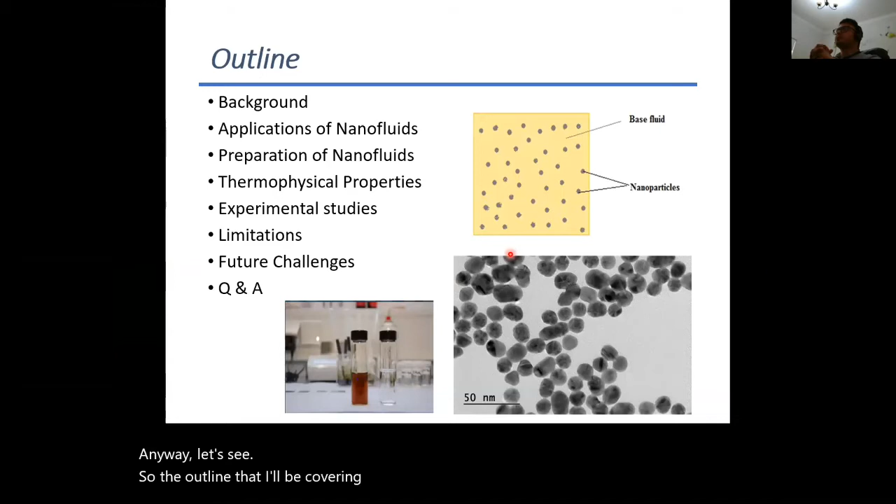The outline that I'll be covering includes the background, applications of nanofluids, preparation of nanofluids, thermophysical properties, experimental studies, and their limitations. Then we'll look into some future challenges. By the end, you'll have your question and answer session.

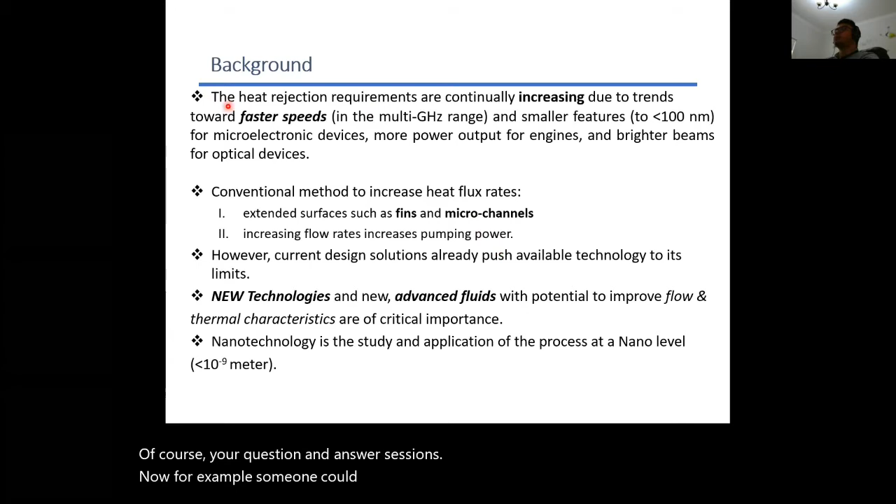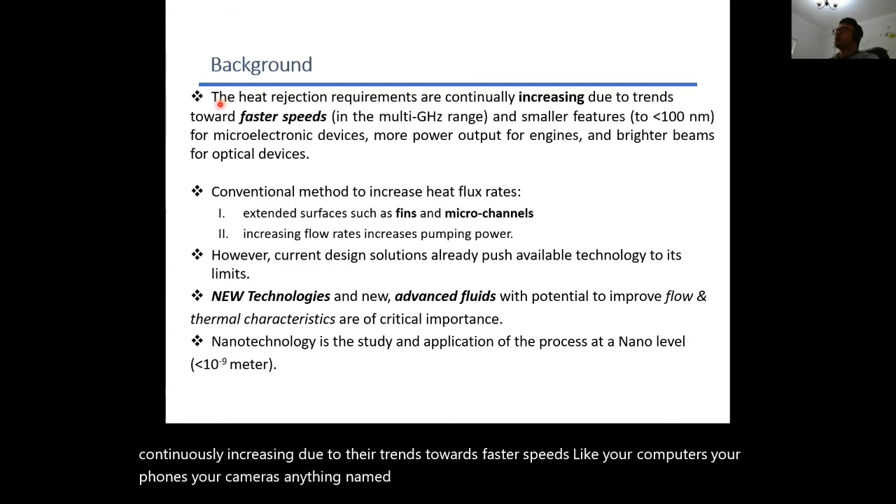Someone could ask, why do we need nanotechnology or new technologies and breakthroughs? We all know things are getting faster, so heat rejection requirements are continuously increasing due to trends towards faster speeds, in computers, phones, cameras, anything. The problem is that in microelectronic devices, engines, or optical devices, they start to heat up.

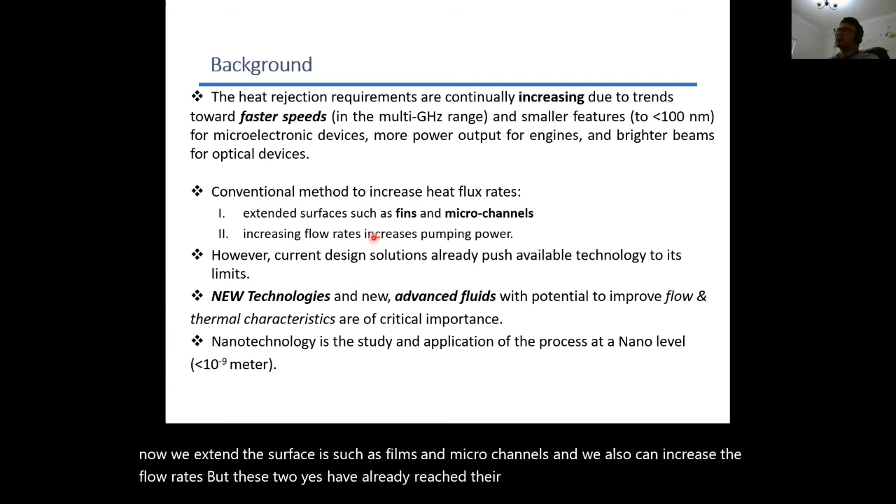So how do we cool them down? Conventionally, what we do even now is extend the surfaces using fins and microchannels, and we can also increase the flow rates. But these two have already reached their limitations, and increasing the flow rate also increases the pumping power, so everything we do has a catch. Current design solutions are already pushed to their technology's limit, and that's the reason why nanotechnology started.

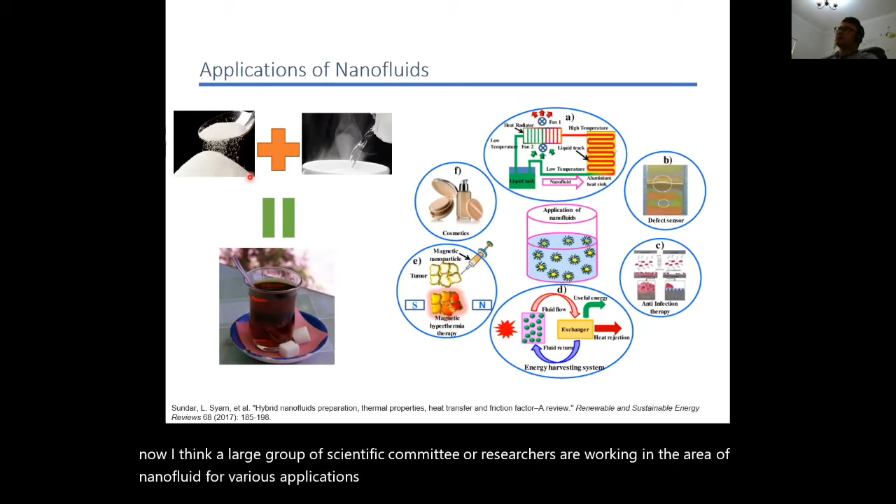To simply explain nanofluids—before it was not very common, but now a large group of researchers work in this area for various applications. An easy example: if you take a spoon of sugar and add it to water, you get a good mixture, like red tea or green tea. The idea of nanofluid is to have our fluid similar to that tea, but without any agglomerates or suspension where particles are not mixed and settle at the end. We don't want that.

An ideal nanofluid is to have it fully suspended within the liquid and become a part of the liquid so that you do not have any stability issues at the end.

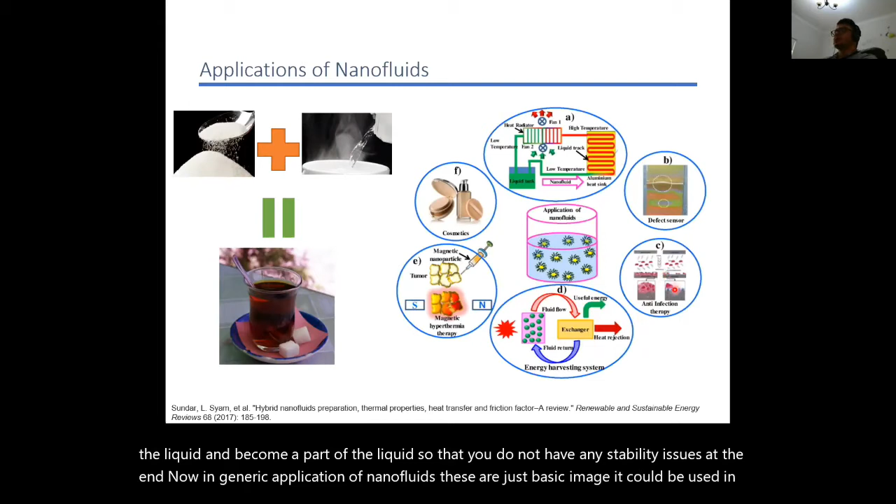Now, in generic application of nanofluids, these are just basic images. It could be used in defect sensors, for anti-infection therapy, for energy harvesting systems. Nowadays nanoparticles are being used in cancer treatment, you have them for tumors. I mean, various applications - it's also used in cosmetics.

My area mainly is the energy harvesting system and heat transfer, which is here between different solar collectors, shell and tube heat exchangers, microelectronic devices, heat sinks. So this is my main area.

But anyway, I'll show you some basic applications. So here, most of these figures, for example, this and this, are my studies that I started with in my PhD. So we use nanofluids in order to enhance the overall heat transfer coefficient. We studied in detail the energy and exergy efficiencies. We found that using nanofluid enhances the efficiency of varying solar collectors.

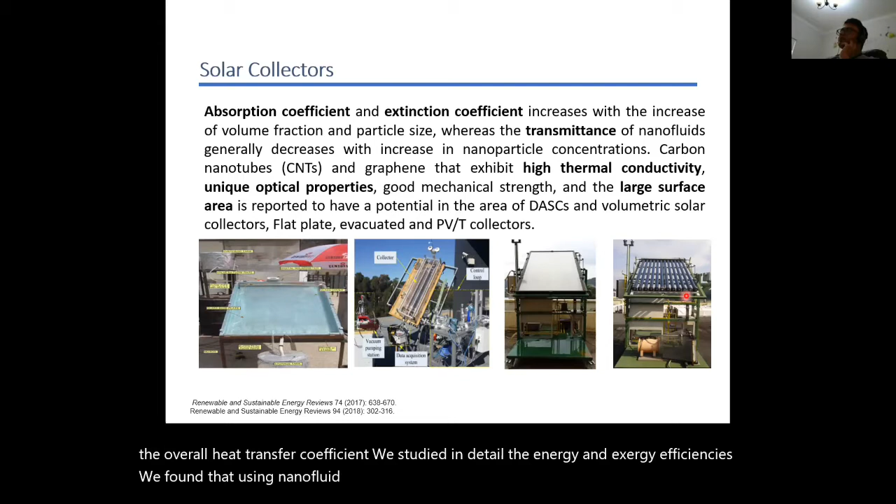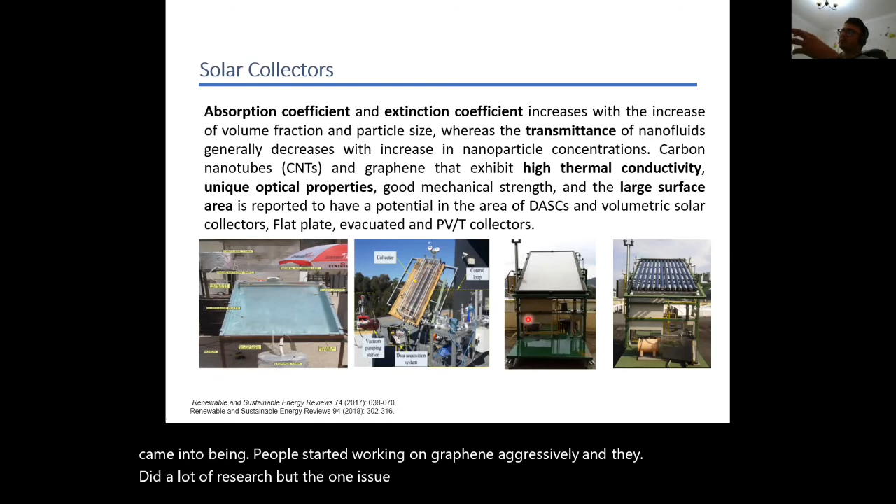Then, of course, people first tried metal oxides because they're cheaper. Then graphene came into being. People started working on graphene aggressively and did a lot of research. But one issue is again the cost here - the better the thermal conductivity, the better the properties, sometimes the cost is higher for those nanoparticles.

So this is one of the challenges that we'll talk about later, on the cost. Yes, you can take nanoparticles such as graphene, which has better properties, but the more amount of graphene you use, we know how expensive it is, and making large amounts of graphene with good quality or less impurities is not easy.

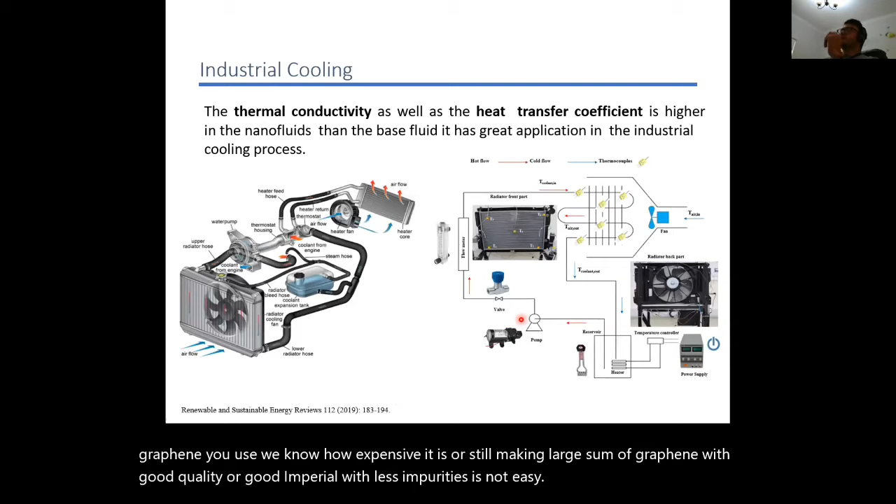The second application is that the thermal conductivity as well as the heat transfer coefficient is higher in nanofluids than the base fluid, because later I'll be showing how the comparison is between the liquid and the nanoparticles. The base fluid, so it has a great application in industrial cooling application.

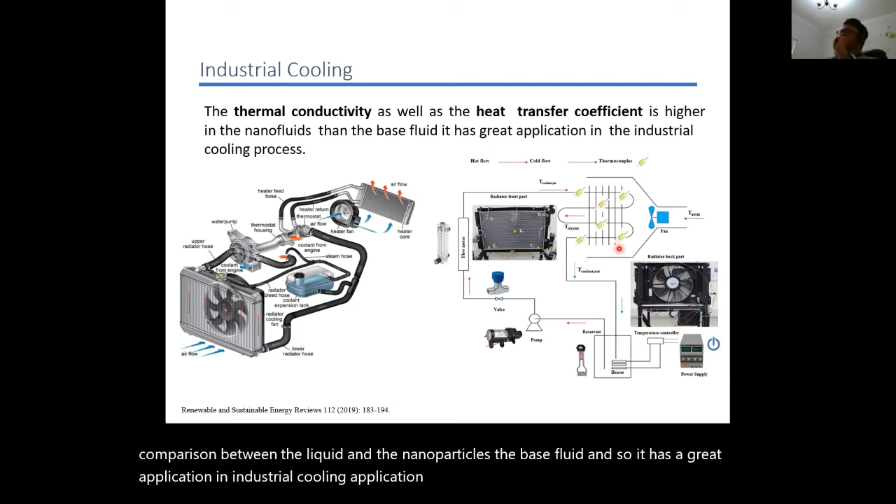For example, this one - we tried to use it in a Toyota Corolla radiator. This is for a 1.6 engine car. We saw that using ethylene glycol water mixture with aluminum separately and titanium oxide TiO2 nanoparticles separately, the effectiveness increases, the efficiency increases, the Nusselt number increases. Of course, it's directly related to the flow rate.

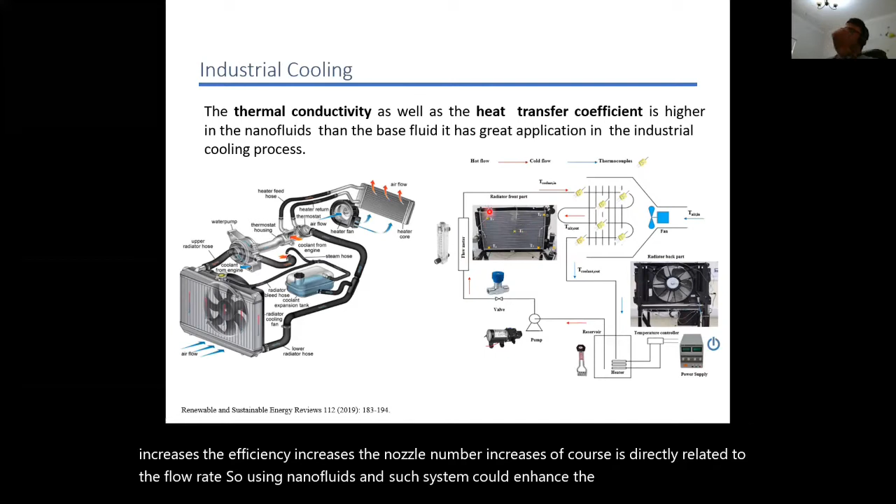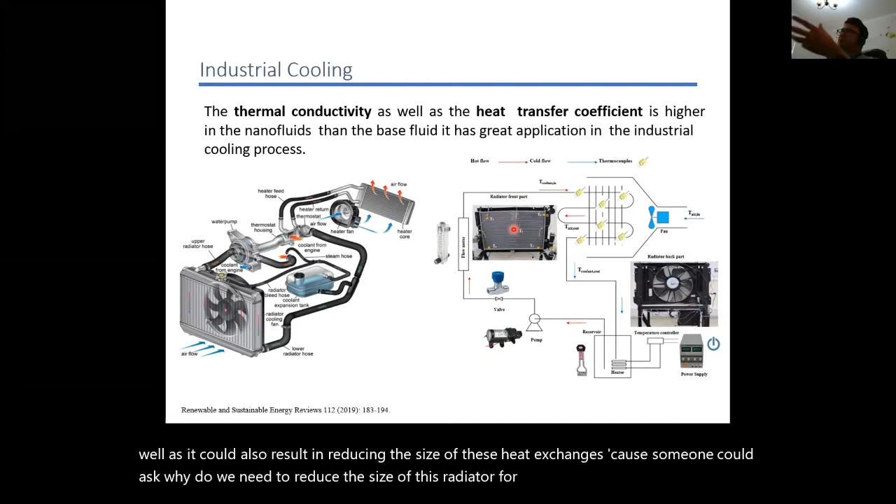So using nanofluids in such systems could enhance the overall performance, as well as result in reducing the size of these heat exchangers. Because someone could ask, why do we need to reduce the size of this radiator? The reason is the smaller the size, the less the weight, and the better your efficiency. So those are reasons why someone aims to enhance heat transfer.

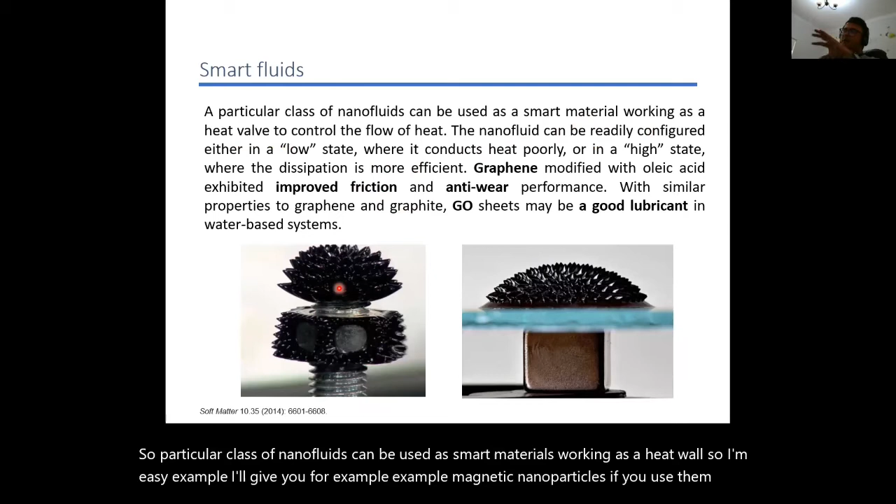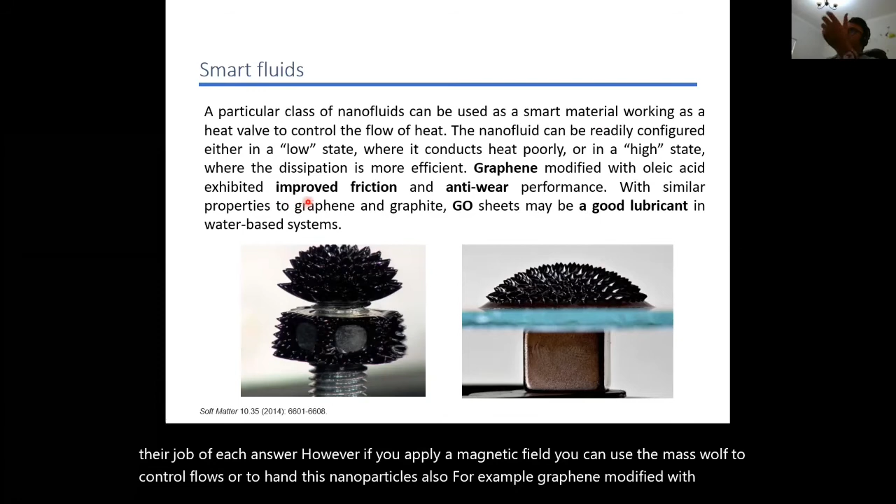Another area is smart fluids. So a particular class of nanofluids can be used as smart materials working as a heat valve. An easy example is magnetic nanoparticles. If you use them in water without applying a magnetic field, they will be suspended and doing their job of heat transfer. However, if you apply a magnetic field, you can use them as a valve to control flows. Also, graphene modified with oleic acid has been proven to show improved friction and anti-wear performance.

Similarly, nowadays we have a new group coming up, and a lot of work is coming out, especially from my group, my supervisor Dr. Prof. Saidur, and other colleagues, on MXene. MXene also has about 70 different phases and only about 20 are explored, but for nanofluids, not many. So it's a large potential area that could be expanded.

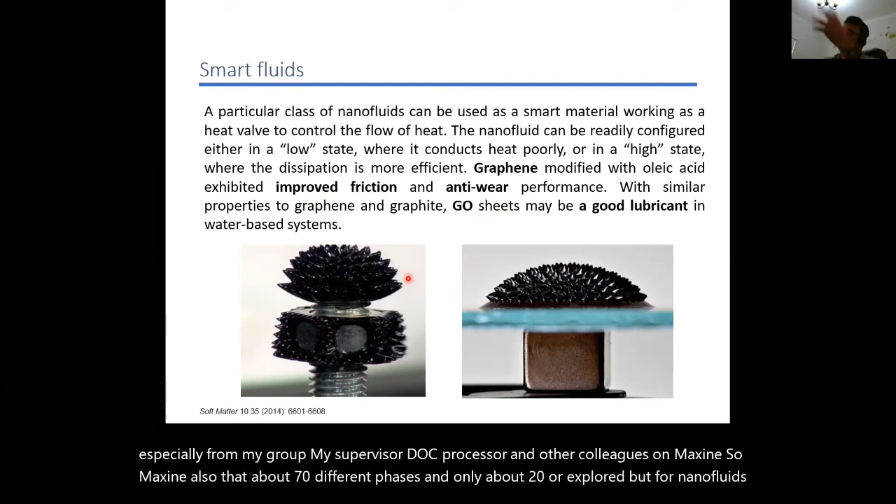Nuclear reactors - this is also an area where nanofluids can be used for cooling. So what we did, we started a couple of papers on possible application for the PWR, that is the primary coolant, standby safety system, accelerator targets, plasma diverters, and so forth. So we investigated aluminium, Al2O3, TiO2, CNT with water-based nanofluids, and we found that using nanoparticles actually enhances the efficiency and does not have any negative impact, which is actually a good potential.

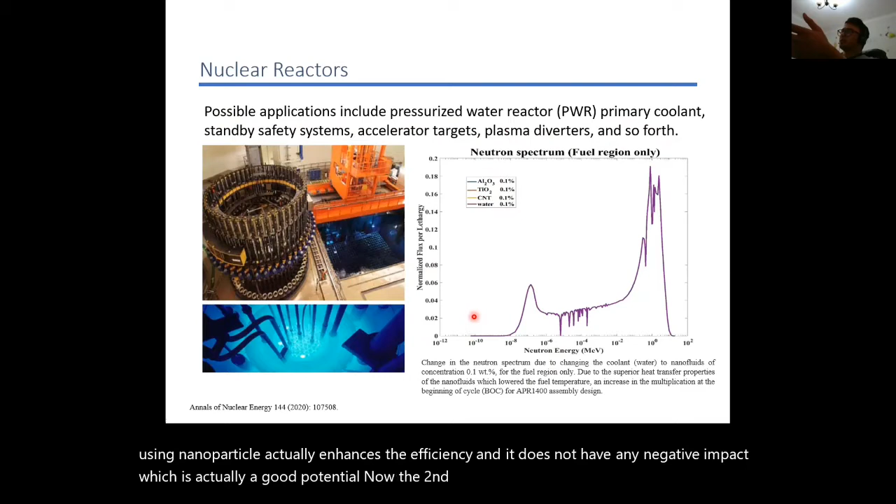Now, the second study we are currently doing is to see the effect with rising temperature, because when increasing temperature or changing pressure, we want to see the stability of these nanofluids. For that case, we are considering the multi-wall carbon nanotube because we know they can withstand high pressure and temperatures. But the idea is to see, when we increase temperature high and then back and forth, if there is a hysteresis loop or not.

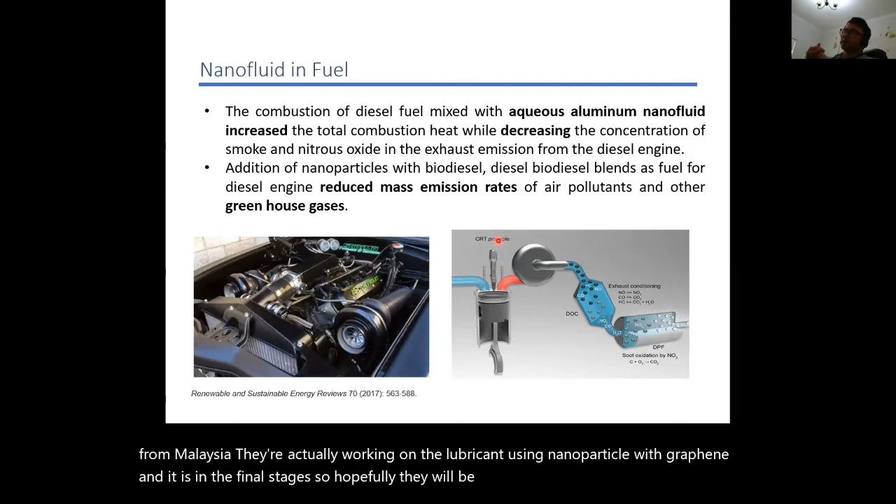Another example: a group of my friends from Malaysia are working on a lubricant using nanoparticles with graphene, and it's in the final stages. Hopefully they'll have a graphene-based lubricant for engines. Studies have shown that nanoparticles can enhance fuel efficiency, reduce emission rates of air pollutants and greenhouse gases, and reduce exhaust gases overall. So using nanoparticles in your fuel enhances its properties.

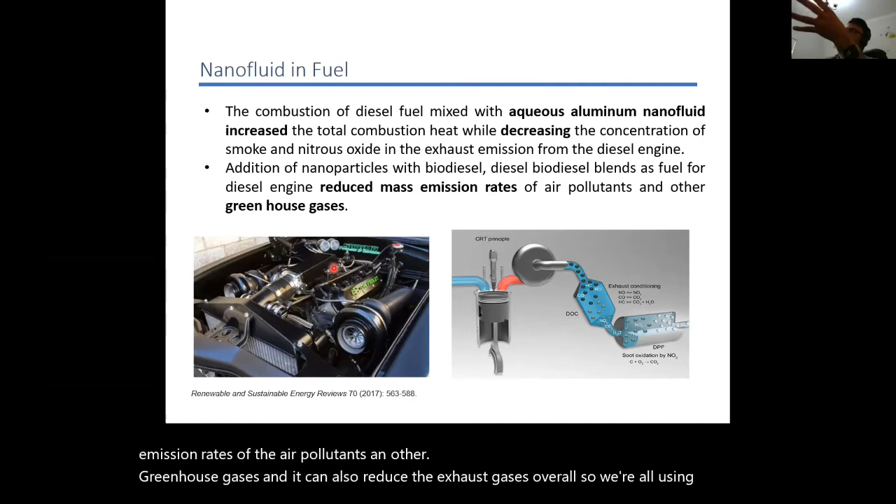Another thing is microchips. The faster we become, the smaller we go. For example, Apple now has a processor of 5 nanometers; previously they had 7 nanometers, and they're targeting even smaller to increase speed. But when this happens, a high amount of heat is generated, so how do we get rid of it? Nanofluids could be used as cooling fluids around these chips. For example, supercomputers are cooled with coolants, and these coolants could have nanoparticles for better efficiency.

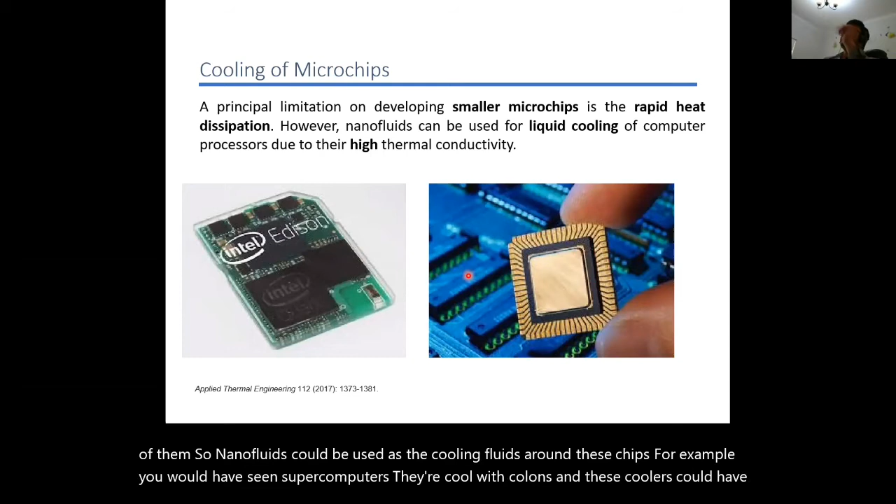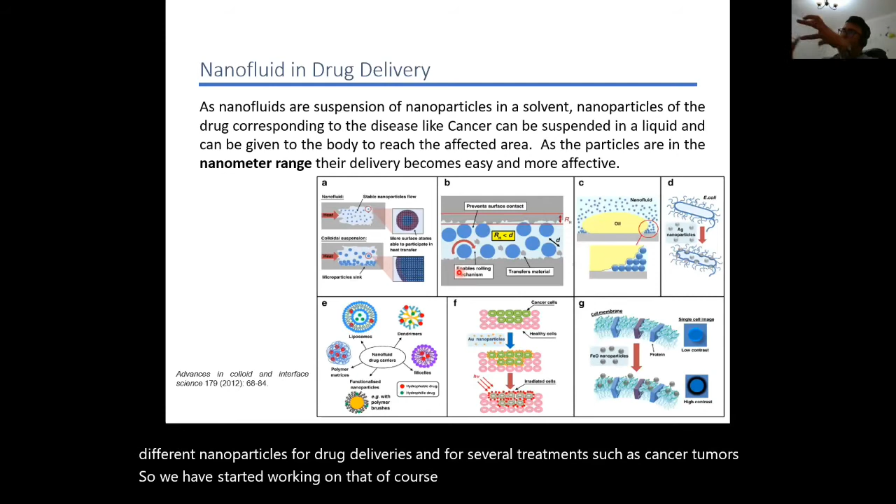Another area is nanofluid in drug delivery. This is a group I joined recently, between engineering and medicine. We're trying to work on different nanoparticles for drug delivery and treatments such as cancer and tumors. We've started working on that. Of course it's not my area, but my expertise is in nanoparticle characterization, synthesis, and stability, which is very important even in drug delivery. So I do have those expertise, and we are trying to explore different areas.

This was a paper back in 2012, and now there are a lot of advances. One good example is the cell membrane - you can't see the pictures clearly, but using, for example, FeO nanoparticles, you can get high contrast images. Another way is using gold or silver nanoparticles. If you put Au nanoparticles, they go to the cancerous cell, targeted in a way that they surround the cancerous cells. Once you send in radiation or laser sources, they kill those infected cells. So this is another application.

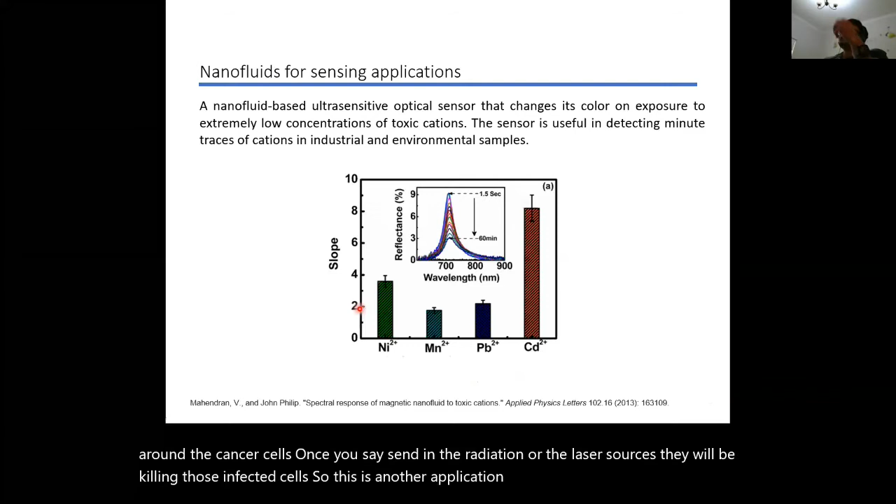Well, there are a lot, you can see several. Nanofluid for sensing applications - these are also studies people are doing, showing that even very minute traces of cations in industrial or environmental samples can be detected using different kinds of nanoparticles, mixed with the appropriate solution. So these are some of the applications, though there are many I left out and didn't mention.

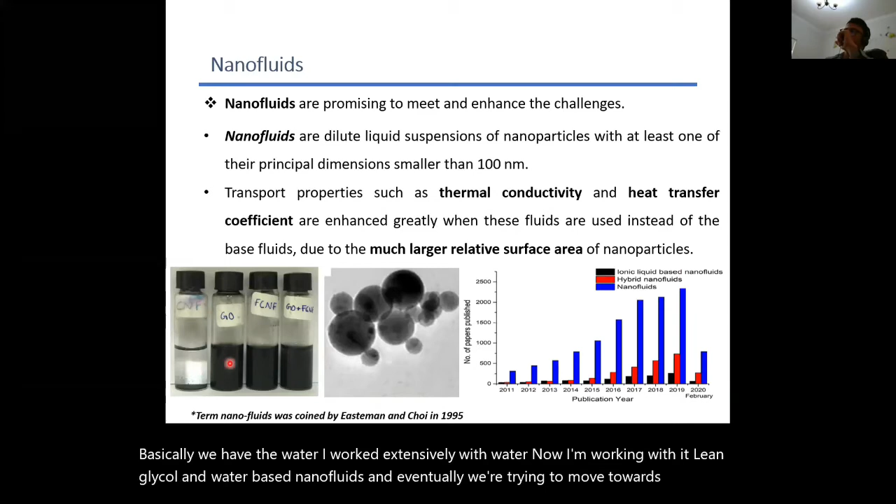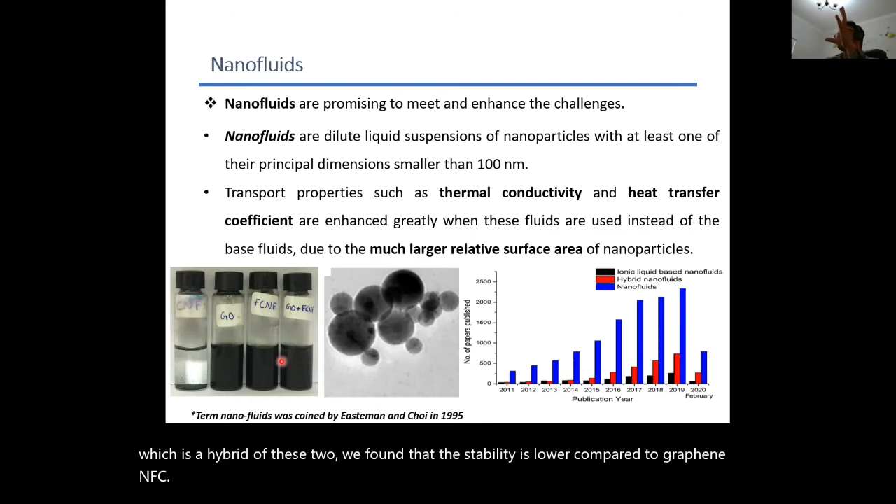This is an example of carbon nanofibers we prepared in our lab, suspended in water - you can see clearly it aggregates, with no stability, or very bad stability. This is graphene oxide; everyone knows when you suspend it in water, it stays stable. This is functionalized carbon nanofibers - the same carbon nanofiber functionalized using HCl and H2SO4, and it stays suspended. If we take a hybrid mixture of these two, we found the stability is lower compared to graphene and FCNF. These are some of the challenges people are still working on to get nanofluids that are stable for the long term.

Here is a figure showing the number of papers published on ionic based liquids and hybrids. Hybrid research is increasing gradually since 2011. Nanofluid publications are very high, and the number per year for 2020 and 2021, I would say, will cross even 4,000 papers.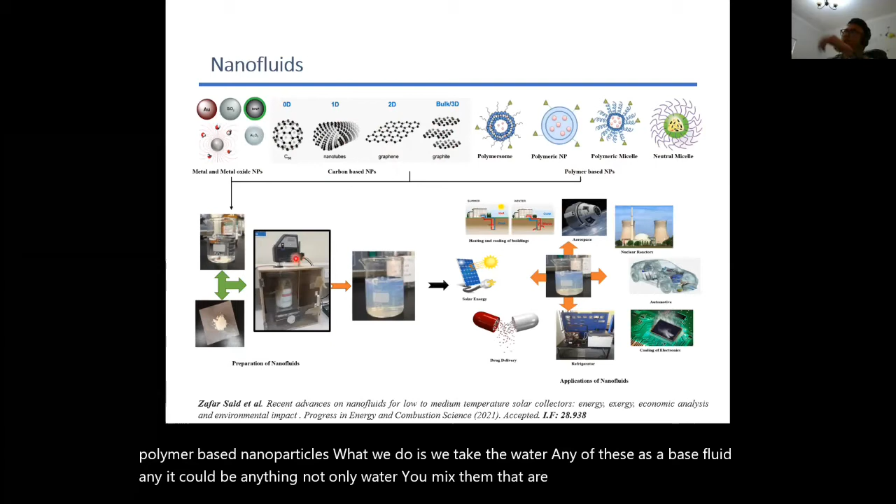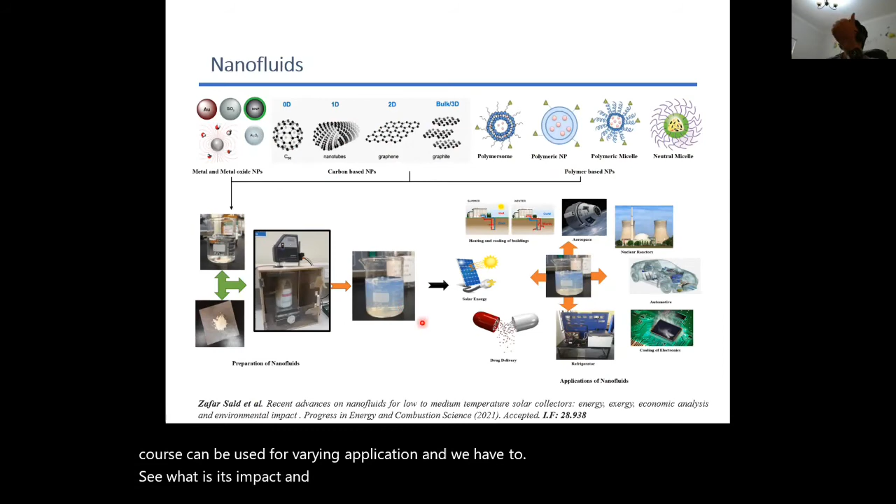You mix them. There are different techniques: one single step, two-step methods, and you prepare the nanofluids. These nanofluids can be used for varying applications, and we have to see what is its impact and study them. Earlier, people just saw the heat transfer concept, but now with time, people are looking into economic impact, environmental impact, cost analysis, payback period, in order to convince the industry that yes, these things are working, they are giving the properties, and they should be moved now to the industrial scale, and investment should be made in that area.

This is one of the papers we did on nanofluids only for solar collectors in detail in terms of energy, exergy, economic analysis, and environmental impact, in Progress in Energy and Combustion Science. I know publishing in high impact in terms of material and energy storage and batteries, if you do good work, is easy to do. But publishing in the area of nanofluids with high impact journals without doing the proper science and physics background in it is not that easy.

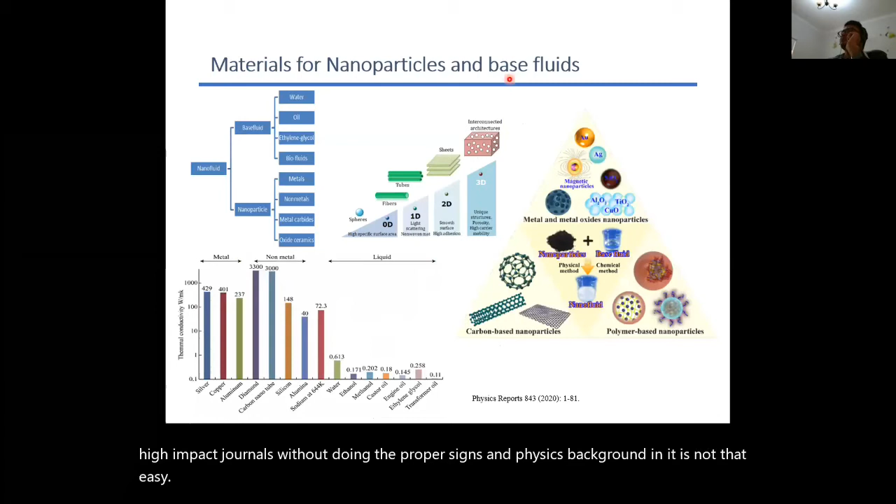So materials of nanoparticles and base fluids here: like we said, nanofluid has a base fluid. It could be water, oil, ethylene glycol, or bio fluids. The nanoparticle could be metals, non-metals, metal carbides, and oxide ceramics.

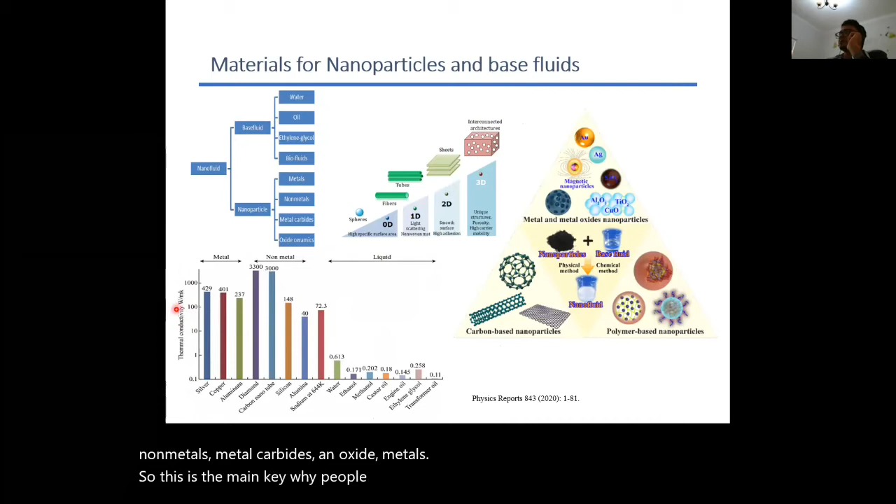This is the main key why people want to suspend nanoparticles in the base fluid. You can see the thermal conductivity of water, for example, is about 0.613. Here you can see ethanol, which is 0.171. Methanol 0.2, and everything you can say is below 0.2 and onwards.

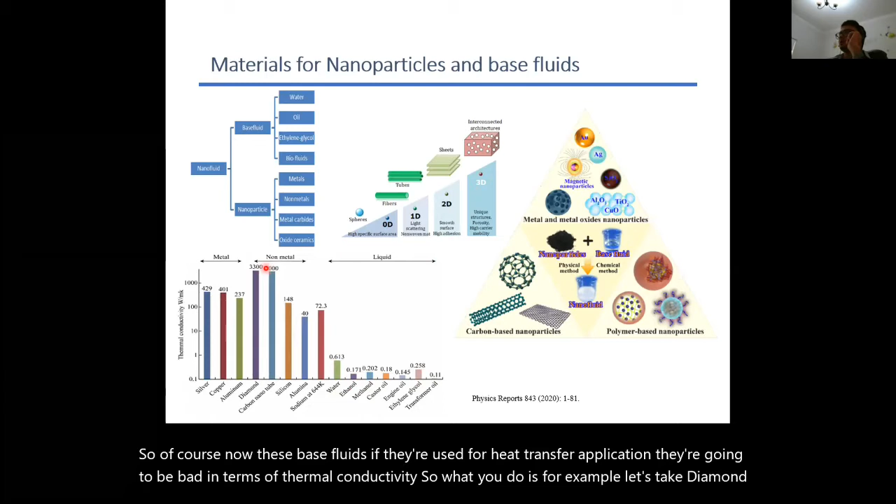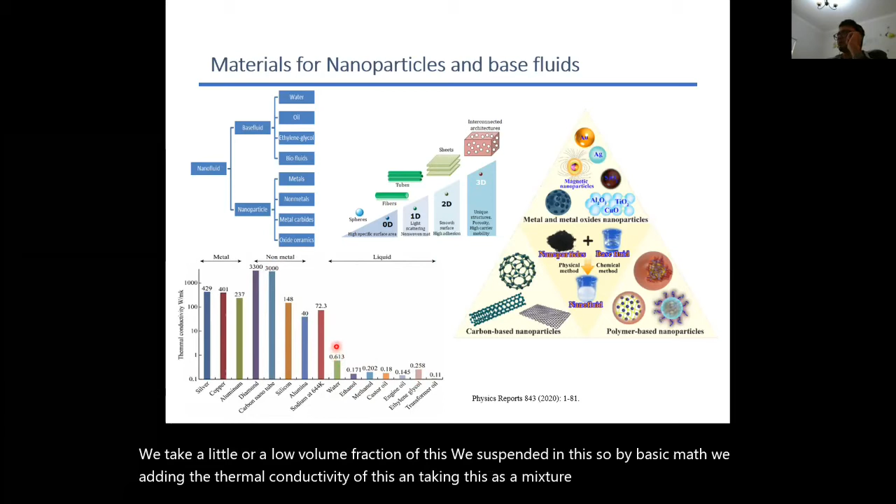So of course, these base fluids, if used for heat transfer application, are going to be bad in terms of thermal conductivity. So what you do is, for example, take a diamond or carbon nanotube. We take a little, or a low volume fraction, of this, and suspend it in the fluid. By basic math, we know adding the thermal conductivity and taking this as a mixture, we know it will enhance it a bit. Maybe the enhancement might not be 100%, 200%, but it could be 20, 30, 40%.

Because the other idea is we cannot also take a large amount of solid particle and suspend it in the base fluid, because that would result in negative impacts such as pumping power, pressure drop, and also it will not be a liquid anymore - it might become an emulsion.

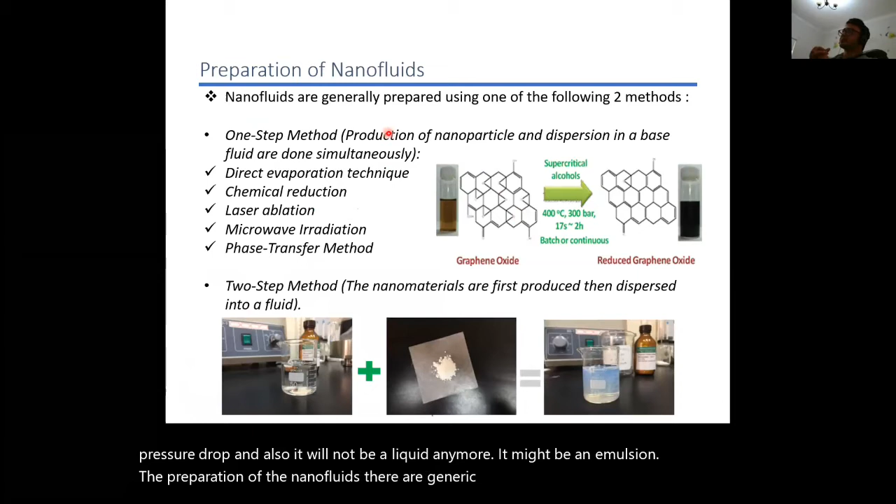The preparation of the nanofluids - there are generally two steps like I discussed earlier. There is a one-step method in which the production of nanoparticle and dispersion in the base fluid are done simultaneously. An example is here: the graphene oxide, you put it and you get reduced graphene oxide. This is the one-step method. You have the direct evaporation technique for preparing it, chemical reduction, laser ablation, microwave irradiation, and phase transfer method.

The most common method, or the reason will be the cheap method, is the two-step method, where the nanoparticles are produced first and then dispersed into the liquid. So you have the liquid, you put the nanoparticle in, you use probe sonication, microfluidic, or different methods for mixing in order to make sure that the nanoparticles are suspended.

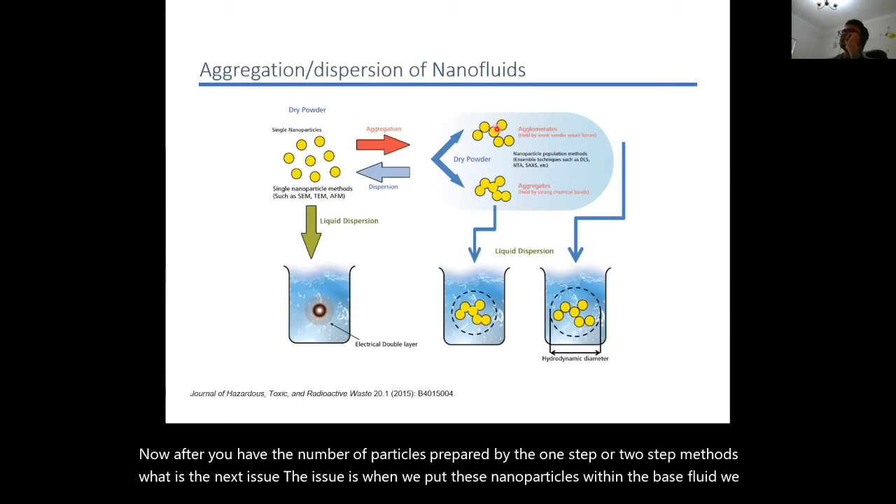Now, after you have the nanoparticles prepared by the one-step or two-step methods, what is the next issue? The issue is when we put these nanoparticles within the base fluid, we might see aggregation. The aggregation could be due to agglomerates, which is held by weak van der Waals forces, or it could be due to aggregates, which is held by strong chemical bonds.

So the main idea is we want to make sure that the best ideal case is to have each nanoparticle suspended alone. But that does not happen. Usually you'll have two or three particles coming together when you suspend them in a fluid.

And then we have different techniques for seeing what the size of these nanoparticles is after we suspend them in the liquid. In powder, we know the size, but when we suspend it as a nanoparticle in a liquid as a suspension, what is the size? So we use the zeta potential, for example, to get the hydrodynamic diameter.

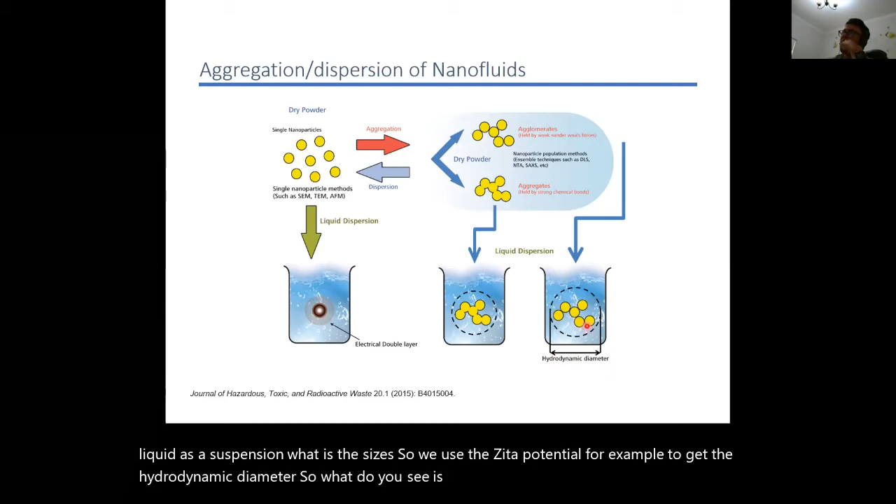What you see is the size of the cluster of these nanoparticles which have come close together, and this is the size that you get. So you don't see the size of one particle anymore—it's, for example, 6 or 7 together. That's the reason why when you check the size of the nanoparticle in a fluid through DLS or other methods, if the original size was 10 nanometers, the current measured size will be 80, 90, or even above 100.

That is because we still have challenges of stability. These aggregation or dispersion issues in nanofluids could be due to physical stability or chemical stability. In physical stability, the failure modes are aggregation or agglomeration, which we already talked about, due to weak van der Waals or chemical bonds. Then you get surface deposition, and once they come together, the density becomes higher, and eventually they sediment.

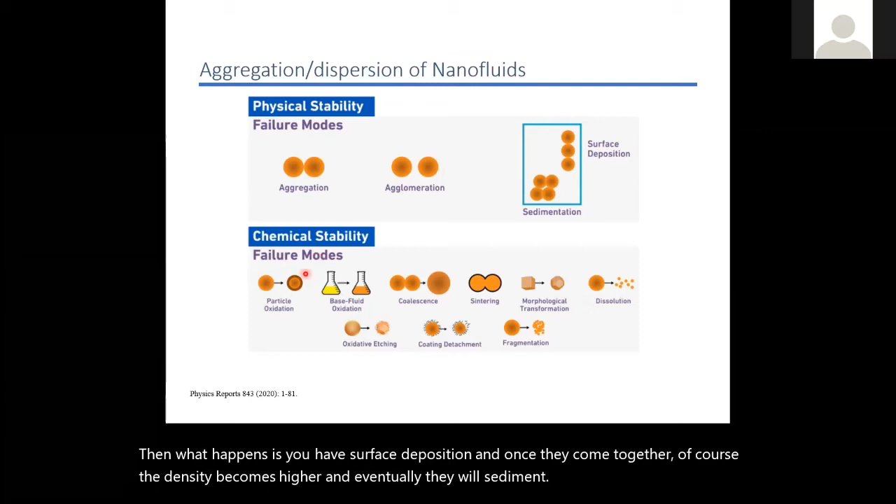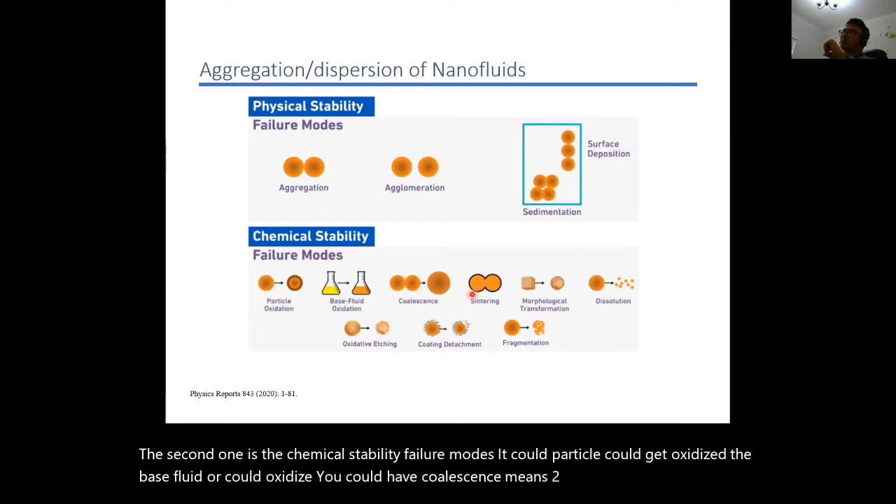The second one is chemical stability. Failure modes include the particle getting oxidized, or the base fluid oxidizing. You could have coalescence, meaning two particles coming together to form a larger particle. You could have sintering, morphological transformation, dissolution, oxidative etching, coating detachment, or fragmentation. So these are all the challenges that still exist for varying different nanoparticles.

Because what people are doing, especially for a long time, even me—I'm from a mechanical background, so my interest is to see the heat transfer, the energy, exergy efficiency, and how that works. But the idea is when you suspend the nanoparticle in the base fluid, we need to know the physics and chemistry behind it.

If we don't know that, with time, I might make a very good nanofluid with high properties, but that might only hold for the first week of preparation. What happens if I look after 6 months, after 3 months? Do the properties stay the same or not? Does the nanoparticle aggregate or not? Is this suspension stable or not? These are very important questions that the industry is interested in.

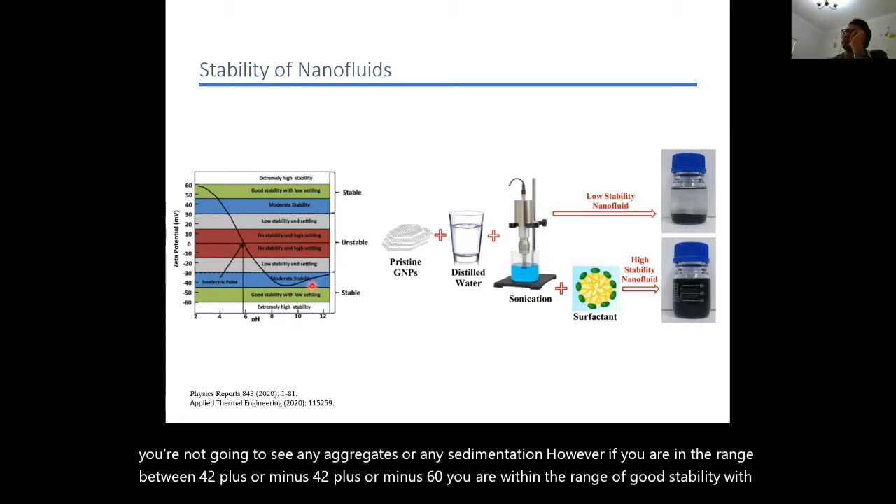In stability, one of the methods to check if a prepared nanofluid is stable is through the zeta potential in millivolts. If we have anything above plus or minus 60 millivolts, it is extremely highly stable—meaning even for 6 months or more than a year, you won't see any aggregates or sedimentation. However, if you're in the range of plus or minus 40 to plus or minus 60, you have good stability with low settling or moderate stability. Anything below plus or minus 30 means that with time you're going to have sedimentation.

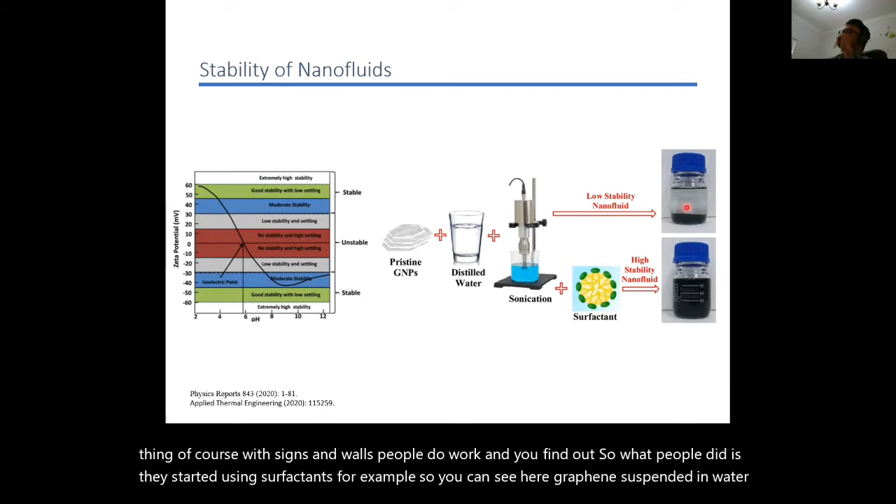This is something that, with science, people work out and find. So what people did is they started using surfactants, for example. You can see here graphene suspended in water sediments right away and has low stability. However, when you add a surfactant, you get good high stability, probably more than plus or minus 60 millivolts.

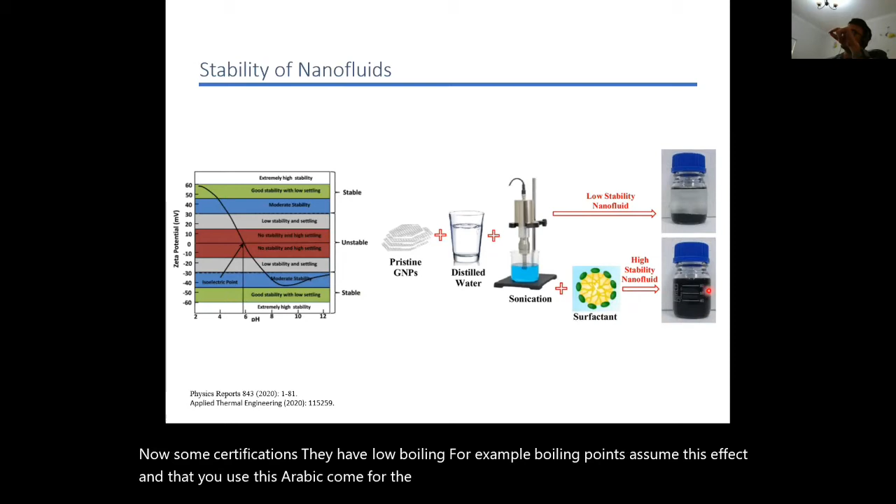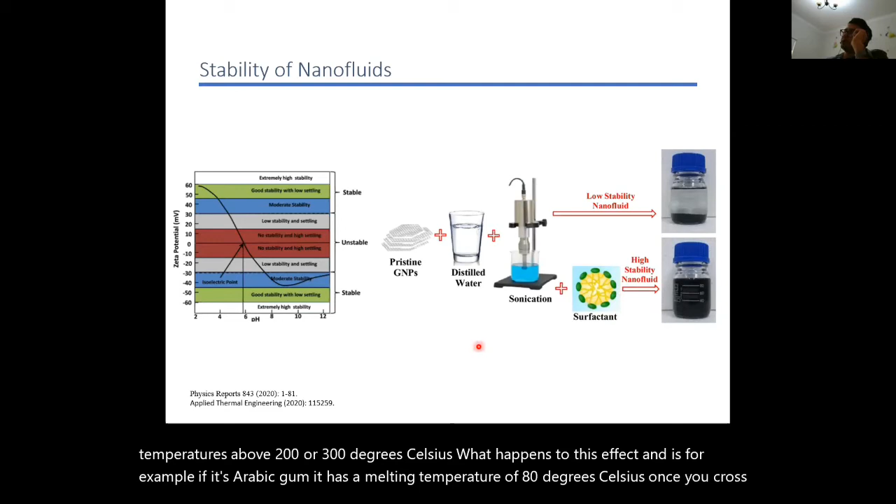But then another question comes in, which is a challenge and limitation that will be discussed later, but I can mention it here. Some surfactants have low boiling points. Assume the surfactant you use is Arabic gum for the nanofluid, and you're going to use this nanofluid—oil based, not water based—for temperatures above 200 or 300 degrees Celsius. If it's Arabic gum, it has a melting temperature of around 80 degrees Celsius. Once you cross that, it will move itself out of the nanoparticle, the nanoparticles will sediment, and on cooling down it forms a cluster itself, the Arabic gum and nanoparticles coming together, which can actually clog your systems rather than give a positive result.

We tried this in one of the evacuated tube solar collectors where the temperature goes beyond 100 degrees. We used Arabic gum with multi-wall carbon nanotubes. We found that with time, once it cools down, it actually clogs the system. Just while it's hot, it keeps working, but once it's cooled down, the Arabic gum ends up clogging the system and forming larger particles rather than smaller ones.

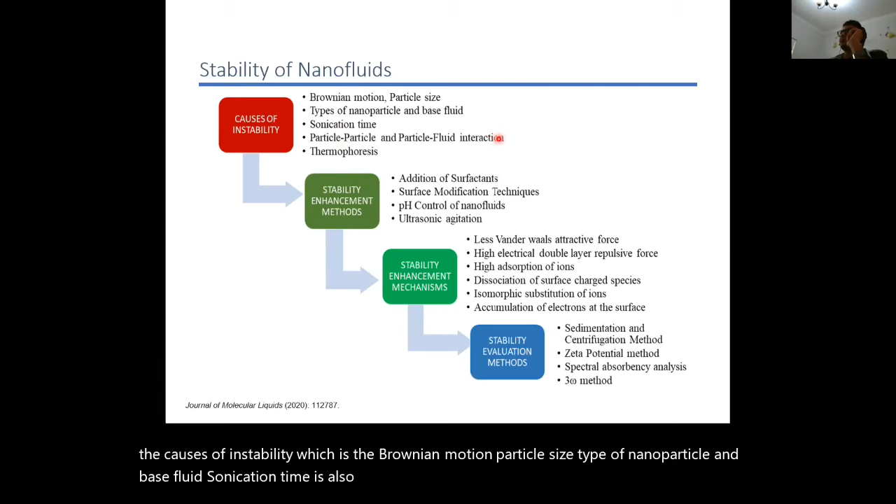Then what are the enhancement techniques? Like I discussed, addition of surfactants, and surface modification techniques, which is functionalizing. I believe functionalizing is one of the best methods compared to surfactants.

pH control is also there, but assume your pH control is maybe pH 3. That's not good for your system in terms of heat transfer. Then there's ultrasonic agitation.

In the stability enhancement mechanism, it could be less van der Waals attractive forces, high electrical double layer repulsive forces, higher adsorption of ions, dissociation of surface charged species, isomorphic substitution of ions, and accumulation of electrons on the surface.

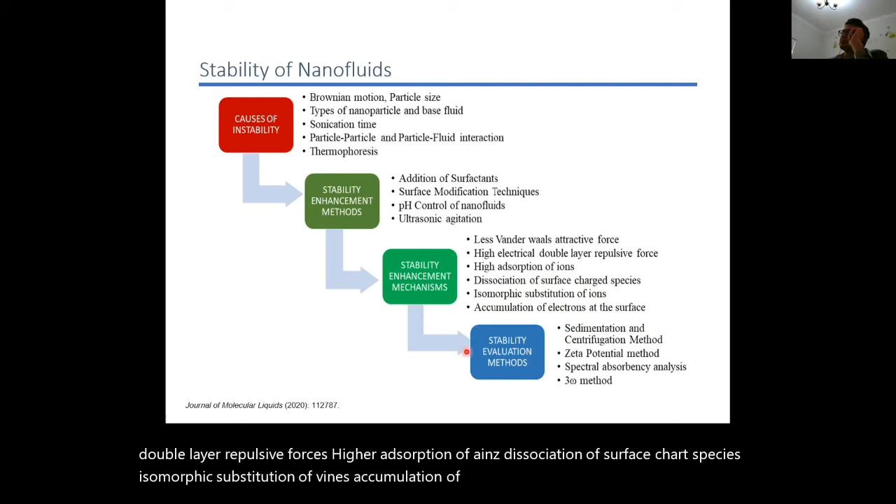And lastly, how do we evaluate them? Sedimentation and centrifugation method, zeta potential method, spectral absorbency analysis, and 3 omega method.

Now we are done with the stability discussion. Of course, there is a lot to discuss, but I'm just giving a brief overview on that.

What happens when we put the nanoparticle in the base fluid? It results in increasing the convective heat transfer coefficient, thermal diffusivity, viscosity, and also thermal conductivity.

Now, there are some properties which, when enhanced, are good for us. There are some which, when enhanced, are not good for us - for example, viscosity. So let's look into these in detail.

The concept of Brownian motion explains the enhanced thermal conductivity that we get in the base fluid. Brownian motion is the key mechanism controlling the thermal behavior of nanoparticle fluid suspension.

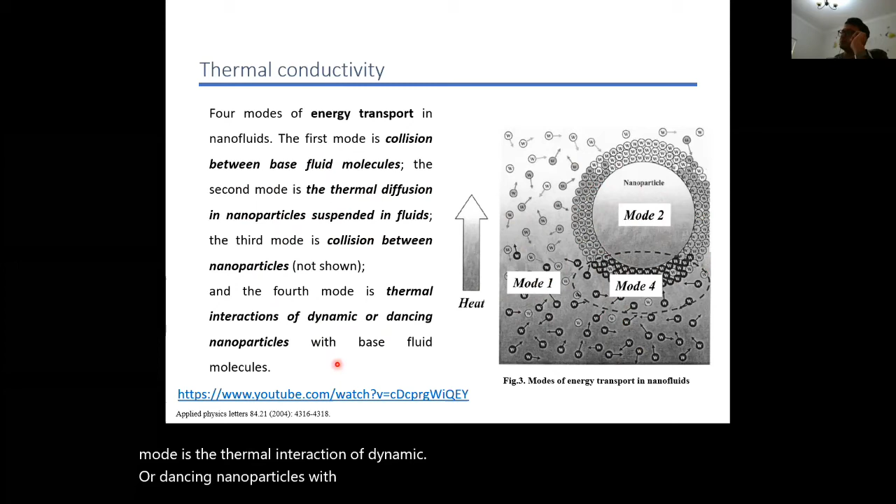Now, thermal conductivity, which is one of the key selling points for nanofluids - but over time, people found out it's not just taking the nanoparticle and suspending it in the base fluid and getting high heat transfer. There are a lot of parameters that need to be taken into account if you want a very good effective thermal conductivity.

One of them is the nanoparticle size. Second is nanoparticle shape, nanoparticle thermal conductivity, nanoparticle concentration, operating temperature, base fluid properties, and thermal conductivity measurement methods. Maybe you take the same nanofluid and measure it with two different techniques, and you might get different values. Nanoparticle stabilization techniques - so here also there is a challenge right away. I'll discuss it here, no need to discuss it later.

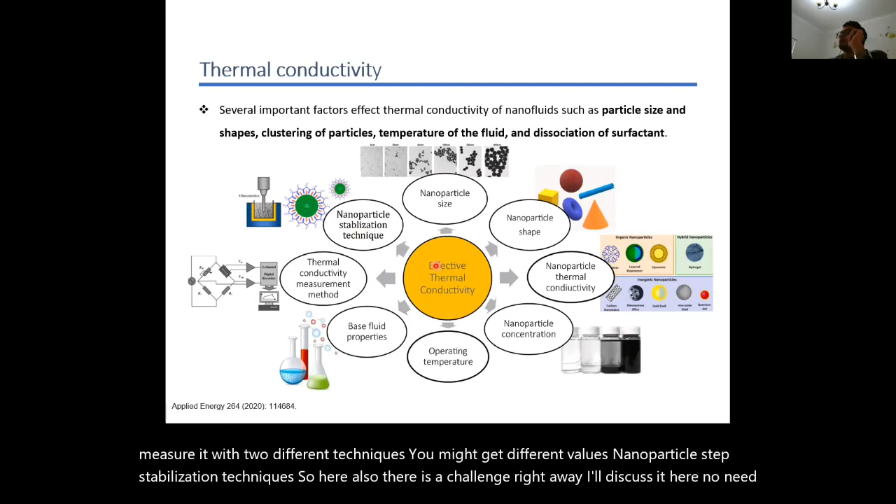So knowing that in the future we need properties, formulas or equations that could predict the effective thermal conductivity. But for it to do so, it needs to take all these into account, which means it is not very easy, at least for the time being, to come up with an equation that can be used for all sizes and shapes of nanoparticles. So this is also a gap that needs to be developed to come up with a universal correlation for different nanoparticles.

The second thing is thermal diffusivity, which is measured in meters squared per second. Of course, if K is increasing, thermal diffusivity will also increase. It is the measure of the ability of a material to conduct thermal energy relative to its ability to store thermal energy.

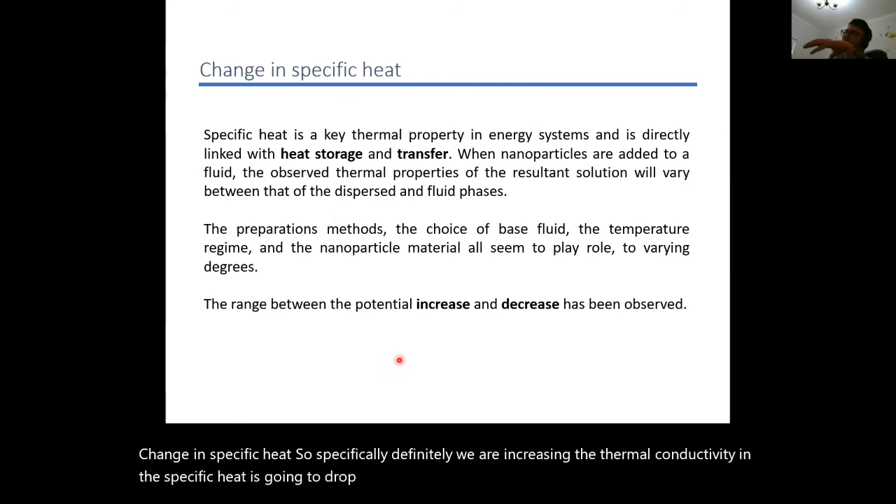Change in specific heat: definitely if you're increasing the thermal conductivity, the specific heat is going to drop. But in some cases we want it to drop, in some we don't. Let's look at this figure. Already studies have proved that if you add nanoparticles in the base fluid, no matter what the concentration is, it will always reduce the specific heat.

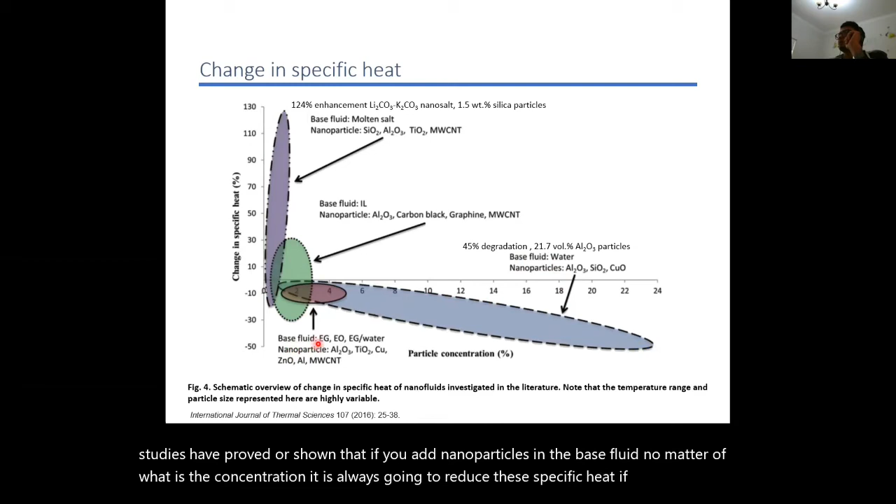If you do the same for base fluids such as ethylene glycol water mixture, the same case applies, it's going to reduce the specific heat maybe up to 15 or 20%. However, if you use ionic liquids, studies have shown that it could increase the specific heat, or it could also decrease. For molten salt, which is a new area where using nanoparticles can help with better properties such as specific heat, it will also result in improving your storage.

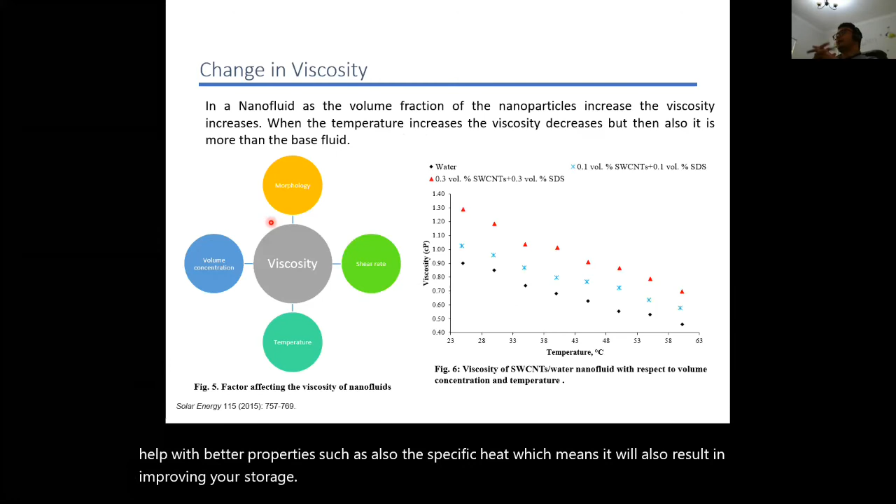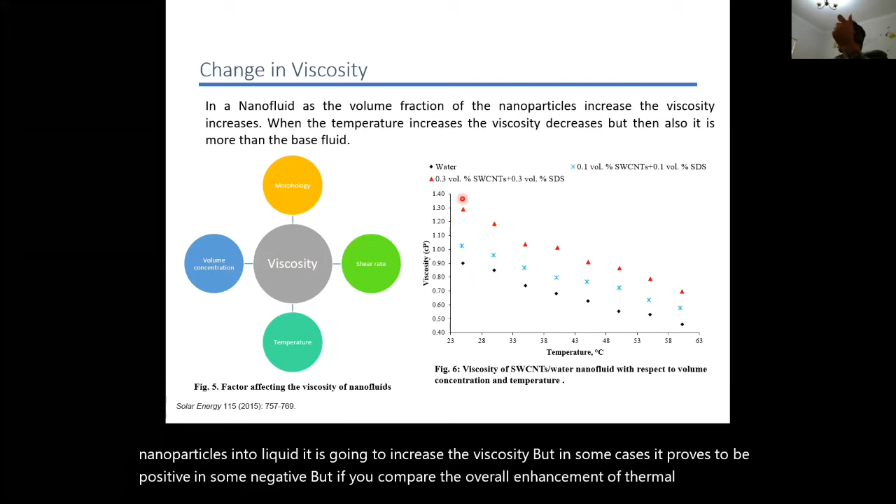Now, change in viscosity: just like with thermal conductivity, viscosity also has various parameters that need to be taken into account - morphology, shear rate, temperature, volume concentration. We know that adding solid nanoparticles into liquid is going to increase the viscosity. In some cases it proves to be positive, in some negative. But if you compare the overall enhancement of thermal conductivity with the viscosity, thermal is higher, so usually this is neglected.

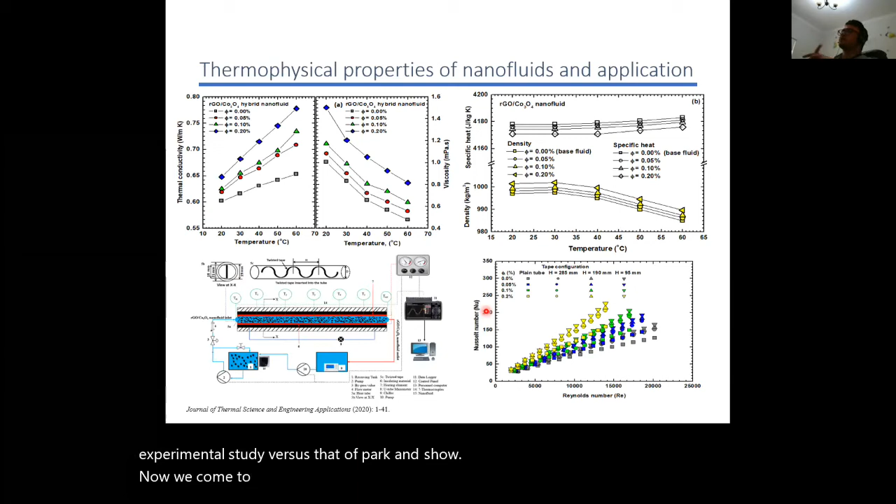Now we come to the applications. There are various applications, I'll just discuss the ones I'm working on. One is studying the thermophysical properties of nanofluid and implementing it in a heat pipe, using both inserts as well as nanofluids. So like I discussed earlier, you can increase the heat transfer surface area, such as fins.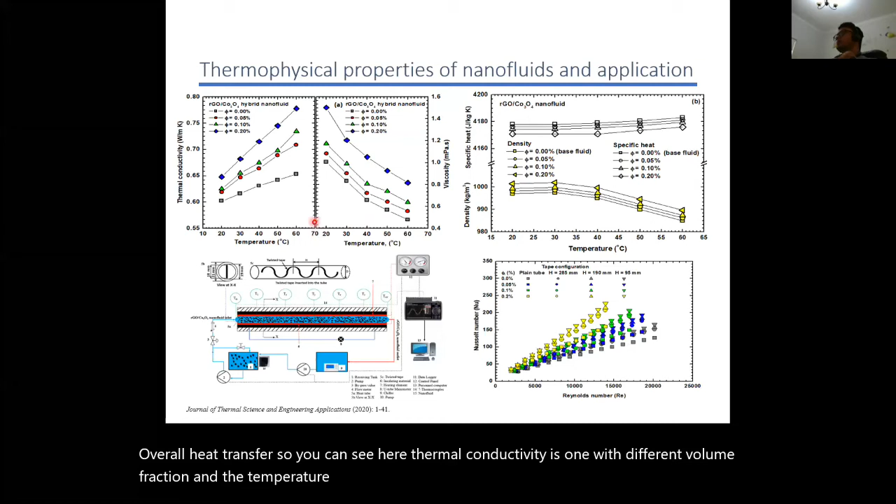What we do is add tape inserts along with nanofluid, and compare the overall heat transfer. You can see here thermal conductivity with different volume fraction and temperature, viscosity with temperature and volume fraction, specific heat - you can see there's a reduction but not much. Density, you see it increases, but it follows the same trend as the base fluid. The Nusselt number is shown here for different Reynolds numbers.

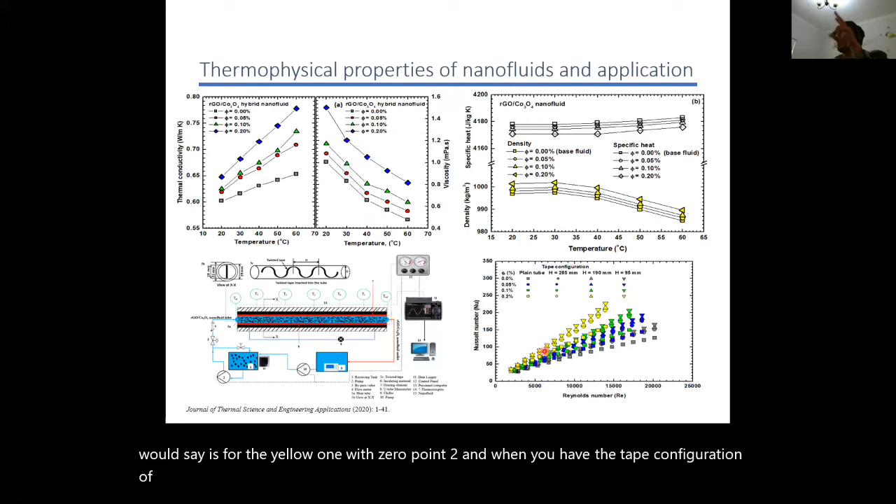The best result I would say is for the yellow one with 0.2, and when you have the tape configuration of 95 mm, you can see the results are higher. So combining both techniques, the tapes as well as the nanoparticles in the base fluid, results in increasing your Nusselt number, which means it increases the overall heat transfer.

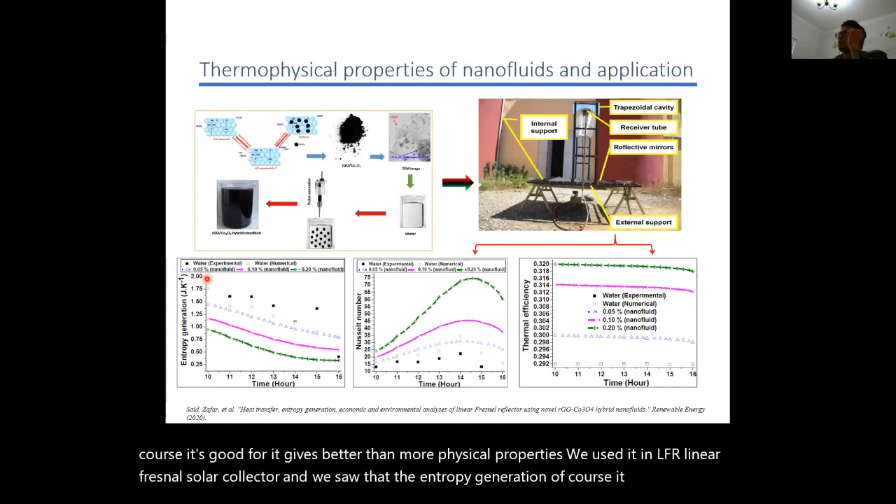Another application is if you take, for example, hybrid graphene with other nanoparticles - it gives better thermophysical properties. We used it in an LFR, linear Fresnel solar collector, and we saw that the entropy generation reduces - you can see clearly from this point to this point. The Nusselt number shows an enhancement with volume concentration.

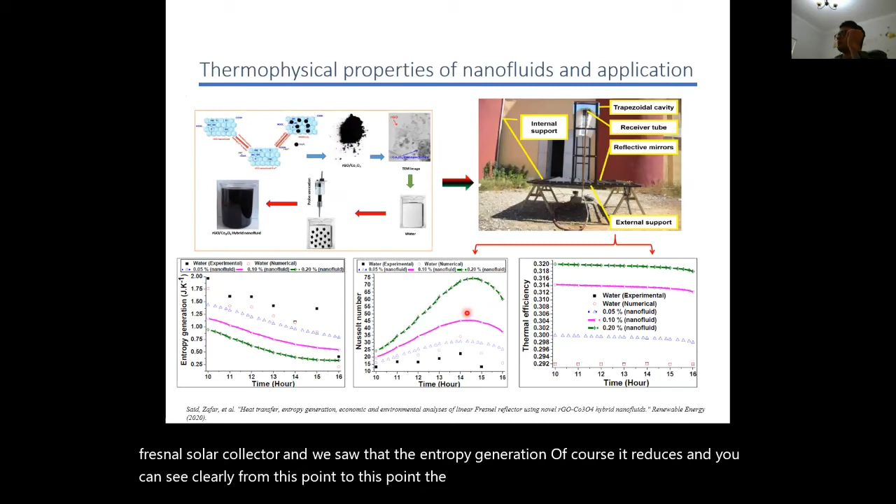And the thermal efficiency, it's obvious, higher the volume concentration, better is the overall thermal efficiency compared to water. But you can see it only increases from 0.3 to 0.32, so it doesn't mean that if you add nanoparticles you will get 100% efficiency.

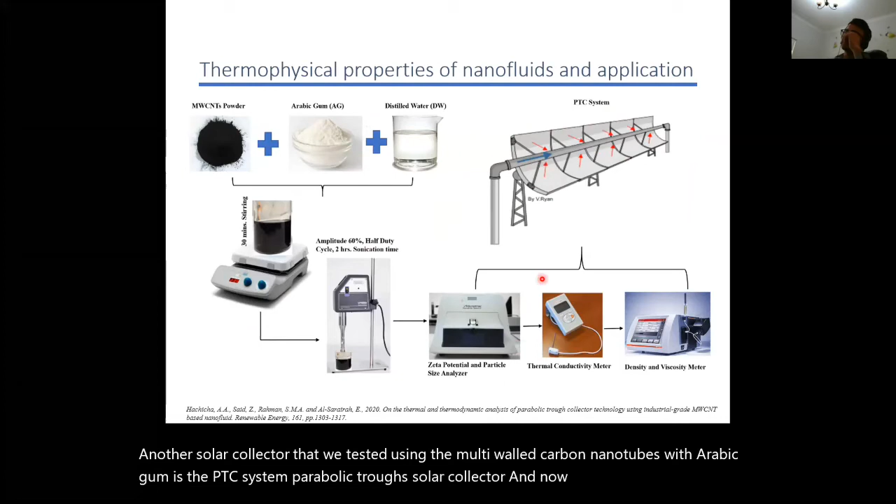Another solar collector that we tested using multi-wall carbon nanotubes with Arabic gum is the PTC system, parabolic trough solar collector, and this was only with nanofluids. Currently we are doing studies with different inserts and fins with nanofluids to see the overall efficiency. Of course, for every study we do the nanoparticle preparation, the properties, and then the system.

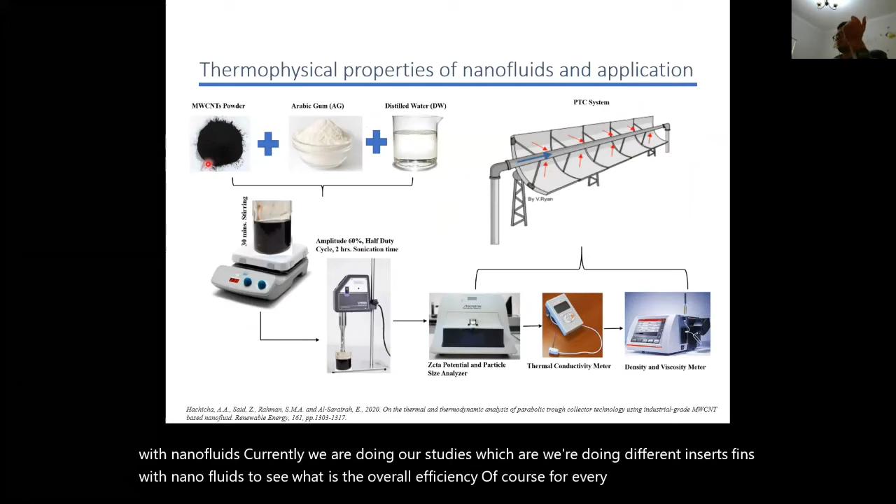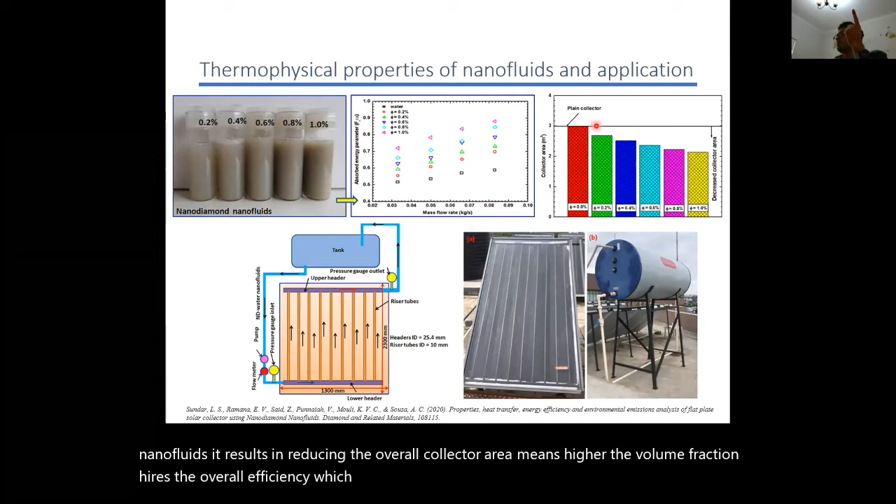Here we have another study of a flat plate solar collector, where we combined nanodiamond nanofluids with different concentrations. What we saw is that using nanofluids results in reducing the overall collector area - higher the volume fraction, higher the overall efficiency, which increases overall performance. This could give you room to reduce the collector area by at least this much - you can see from 2 to 3 meters, or about 1 meter squared.

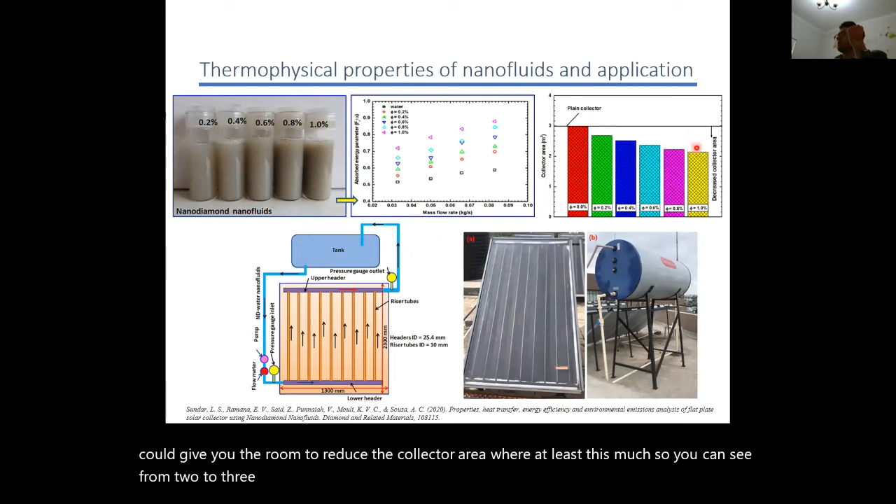The same study we combined with inserts, core rods, and nanofluids, and we saw that the enhancement is even further - it can reduce the area even better compared to using only nanofluids, and overall heat transfer is increased.

Now, this is another comparison with the carbon nanofibers we did, the CNF versus the functionalized CNF. You can clearly see CNF is long, while the functionalized one is smaller in size. This smaller size resulted in better stability as well as better heat transfer compared to the other.

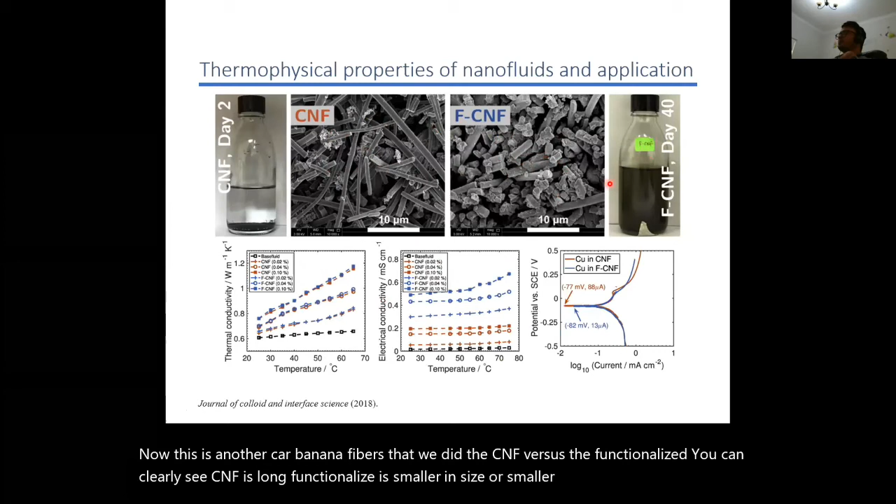But friends, what we found out in the final study is that this FCNF is stable even for more than 40 days. This one, however, is stable when you prepare it, but after 2 days it completely sediments, even though the properties when prepared initially are the same.

We tried to correlate these nanofluid properties to see how they would affect storage, for example in supercapacitors. We found that when thermal conductivity is very high, the material is not good for storage, though it's good for heat transfer. This one, however, would result in better storage compared to the FCNF. This is a study we are still working on, trying to figure out how to correlate the nanofluid properties directly with storage performance, and which material is better for storage.

Now we come to the limitations and challenges. Like I already discussed, one is stability and the different ways we have to look at it. Second is predicting the correlation — we need a universal correlation.

Then there's higher production cost, but there is some good news. With time, more industries are getting into preparing nanoparticles. Things that used to cost $1,000 per gram, like graphene, are now even cheaper. The same multi-wall carbon nanotube, if you get industrial grade, you can now find 1 kg at the cost of $400. So the costs are coming down, and this is one of the challenges that will be addressed soon.

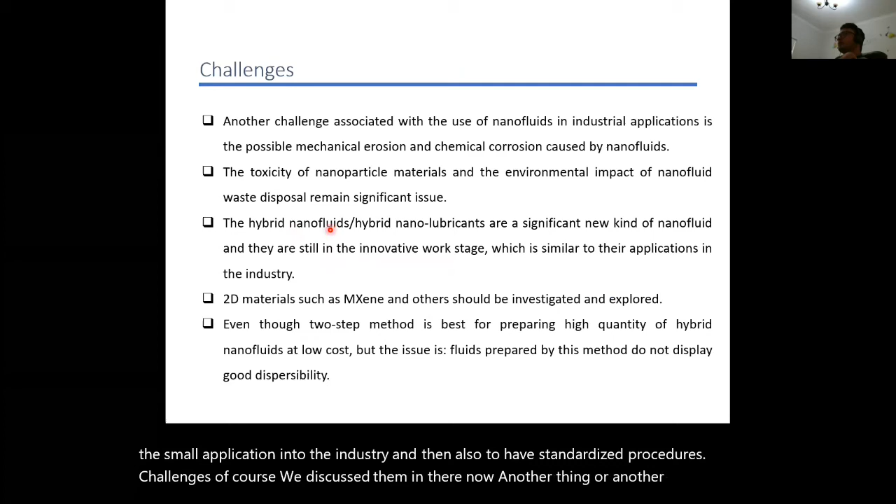...fluid for use as transformer oils, then using 2D materials such as MXene and others to explore their properties, and also to look for better preparation steps and standardization techniques.

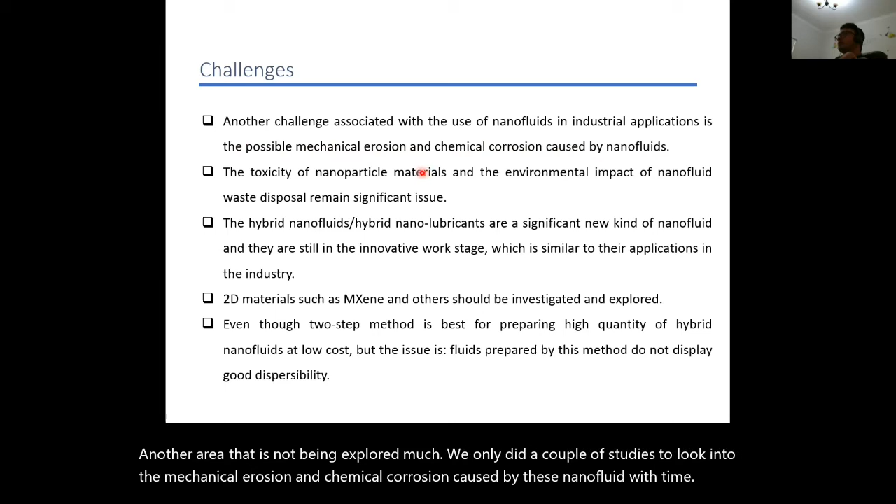Another area not being explored much — we only did a couple of studies looking into the mechanical erosion and chemical corrosion caused by these nanofluids over time. Another gap is disposal. Once you're done with these nanofluids, where do they go? Where are they disposed of? What is their effect on the environment and life cycle? This is also an area that has not been explored much.

This is because we don't have people from that specialization working on this.

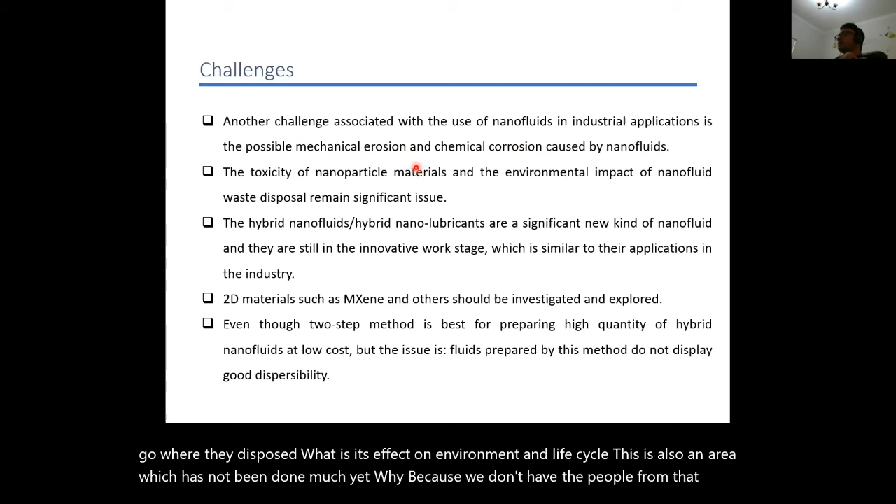If you don't have anyone with a background from nanomaterials, nanotechnology, chemistry or physics who can select the known nanoparticle for the known base fluid, you're going to face issues. So we, as people from a mechanical background, do trial and error, testing them in different systems, and once we get lucky, we mass produce the nanofluids and use them for heat transfer.

If you're doing indoor controlled experiments, it doesn't take much time. However, if you're doing solar collectors or solar systems or anything dealing with nature or weather, sometimes it even takes 1 to 2 years, because if your system is not good, your radiation is not good, you face issues of stability, you face issues of clogging. So yes, there are a lot of challenges with experimental work.

However, with lab preparation and taking properties, things have become faster compared to before.